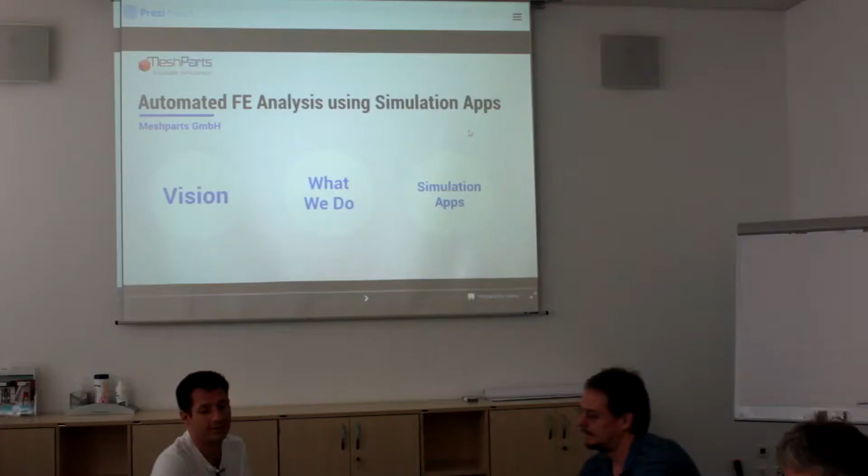Can I see this? Oh, I cannot see it. It's just not possible to have one screen and also see the window. So it's going to be a little complicated to look at you and at the presentation, but let's start.

Actually, I have two presentations. One is the Prezi presentation, and one is the PowerPoint presentation that goes more into detail. The first part is just presenting what MeshParts is doing, what are our products and our vision.

Let's start with our vision. As you can see, our vision is to simulate machine tools, machines. And our vision is to have a virtual simulation model of each single part of each manufacturer. I'm talking about mechanical parts like linear guides, ball screws, bearings, and drives.

Secondly, our vision is to have a component-oriented finite element simulation software for all machine manufacturers. And I'm going to present the software and the library in the next steps.

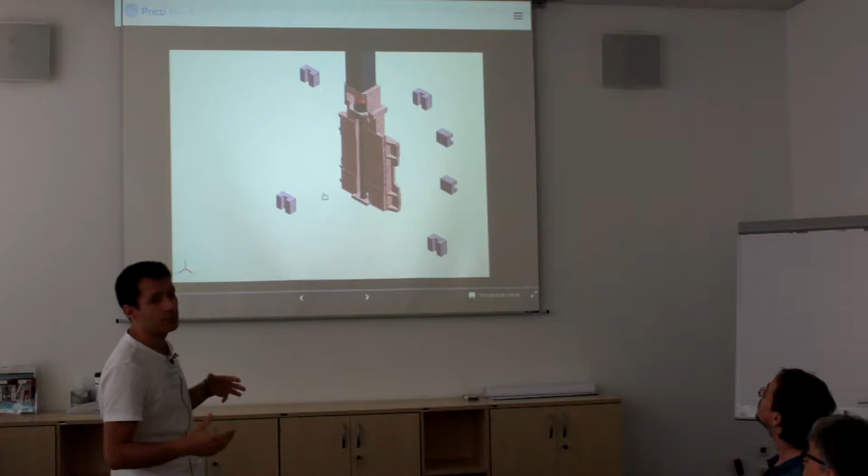Here is just a small video showing the basic idea behind our software. So here you have different finite element models, and you can pick up those models from our library of simulation models and assemble them like you would do this in a CAD system. You can build up very big assemblies of structures just like in a Lego play, and then you can compute, like here in this case, vibrations of the machine, which are very important.

Everything here is TCL. So what you saw is done in TCL, and everything you will see is TCL. So it's about TCL at MeshParts.

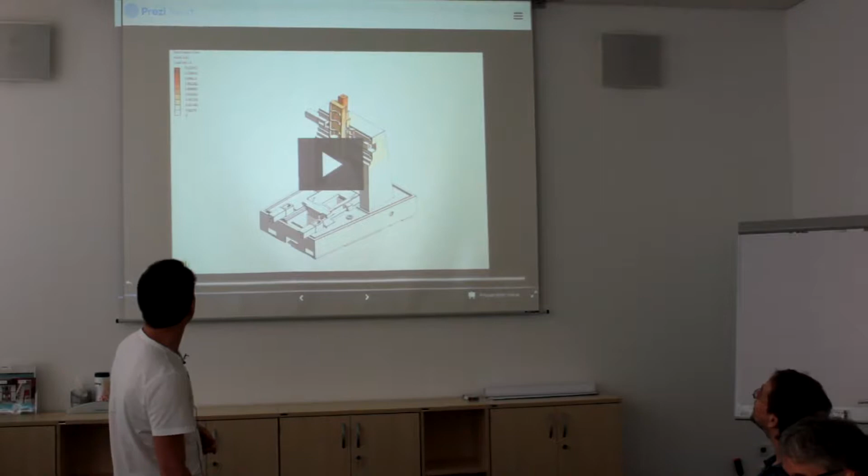Okay, mouse is still on my screen. Okay, let's go back. About us.

MeshParts is a fresh, small company located in Stuttgart, founded in 2013 with 2 people. Right now we are a bigger team, we are 4 people, and we are planning to grow. Probably until the end of the year, we'll be about 10, and we are looking forward to expand our team. So we actually also need new team members. I also search for somebody that can program in C, C++, and TCL.

How we started? Well, the starting point was a research institute, the so-called ISW. This is a research institute in Stuttgart about machine tools and control of machine tools. This is actually where I started as a student and later as a research employee.

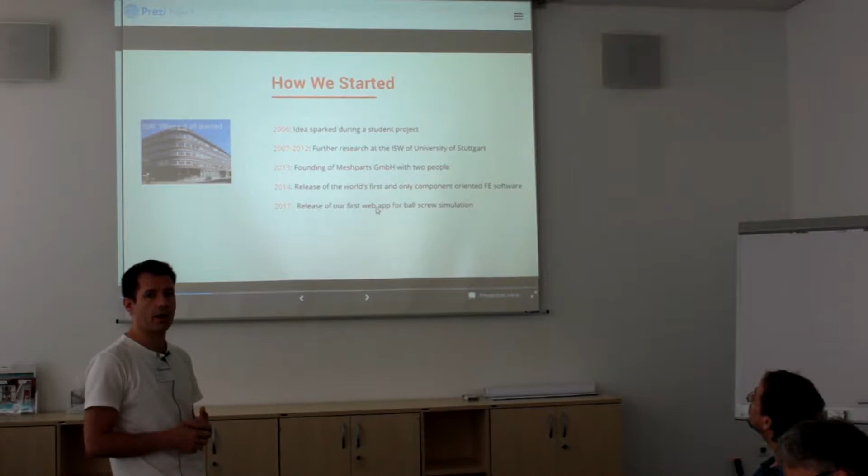And moving forward to simplifying simulation, we are actually doing other stuff right now. We are also doing the so-called web applications, where you only have to input parameters of some standard models, and you can get your simulation report from the web browser. So you don't need any knowledge about simulation, but behind the scenes is still our software, behind those web applications.

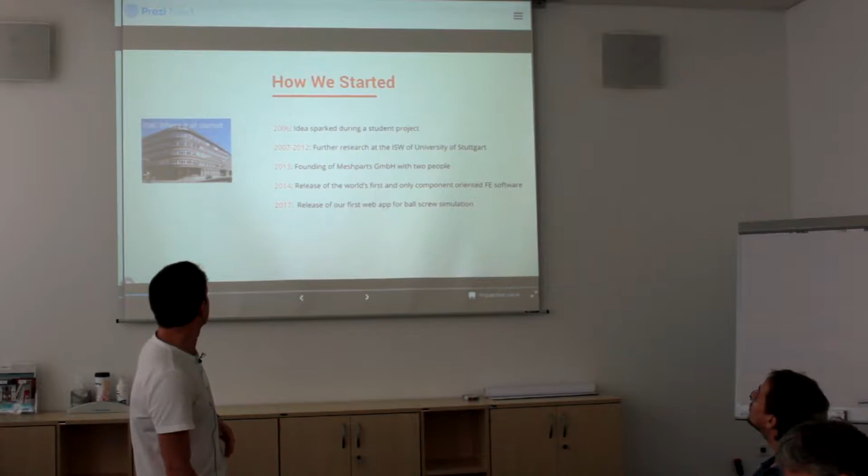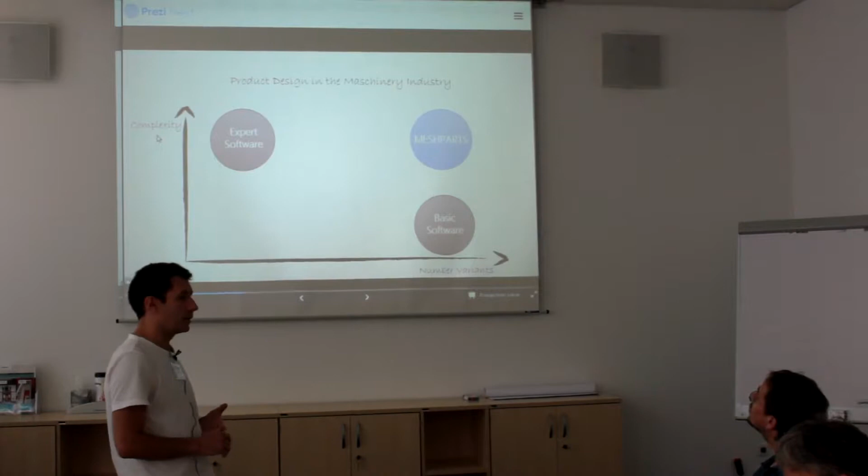So this is how we started. Our strategic positioning, when you look at the market, you have this positioning here. On one side, you have the expert software, which makes it possible to deal with high complexity of modeling. But the drawback of this expert software is that you cannot do a high number of design variants.

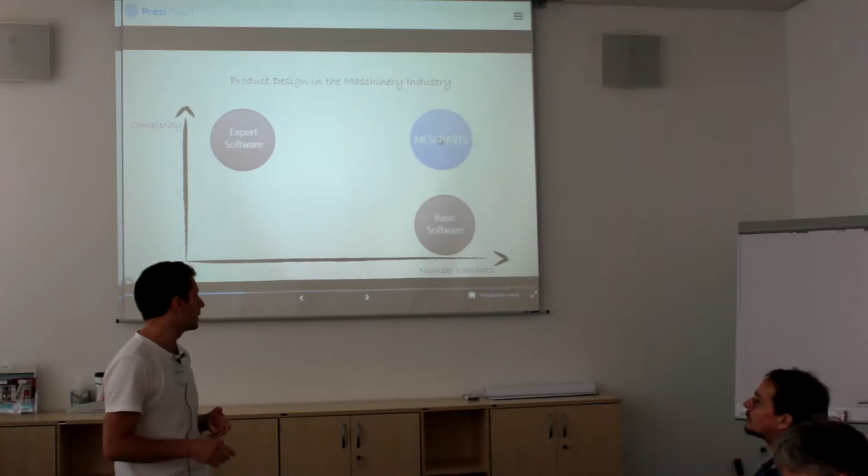So if you want to study design changes in your product, it's going to be difficult. And on the other side, you have this basic simulation software, which doesn't really allow you to do complex things, but it's really fast, and you can do design changes very fast. MeshParts is positioning in the right upper corner, where you can deal with high complexity, and at the same time generate a big number of design variants in a very short time. So this is our strategic positioning.

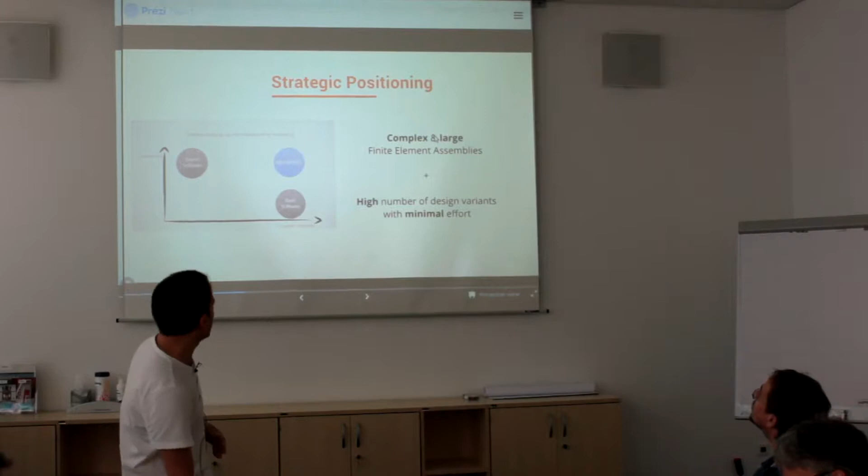Complex, large finite element assemblies and high number of design variants with minimal effort. This is our target.

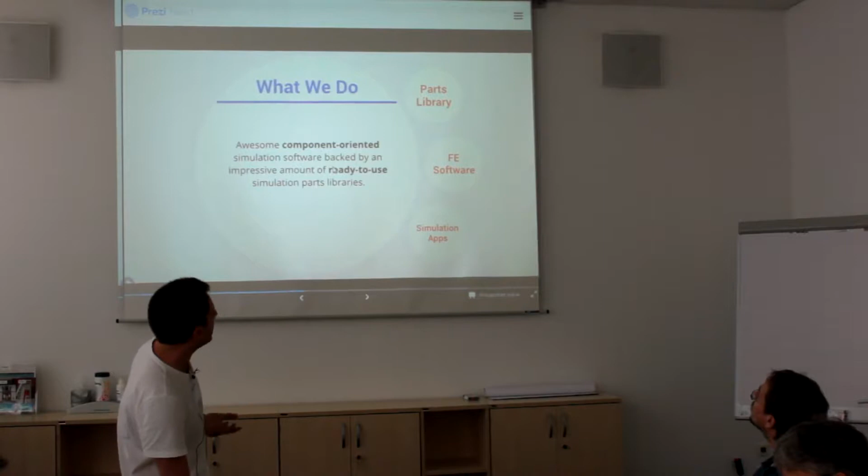So let's go back to what we do in a more concrete way. We have this really awesome component-oriented software, which is almost completely programmed in Tcl, and the whole software is backed by a very impressive amount of simulation models inside of a library, which is available online for everybody to use.

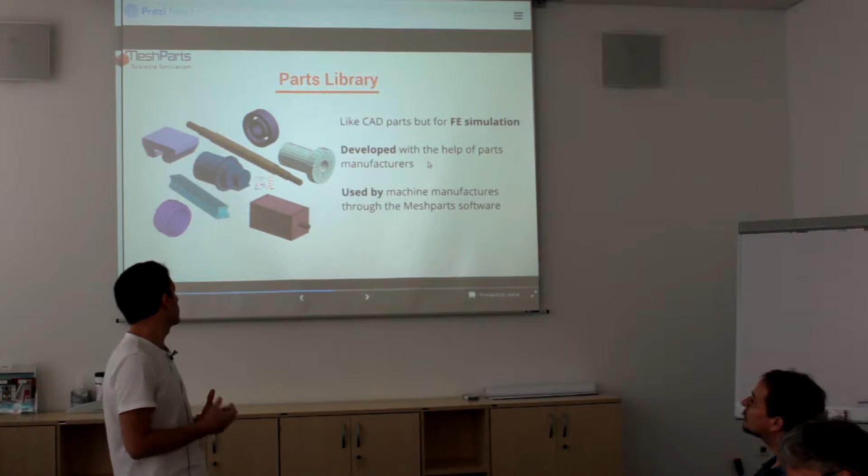I will show you some examples from our parts library. These are the typical models inside this library—mechanical parts that really have mechanical behavior. For example, if you have a gearbox, it will behave like in reality with stiffness, transmission ratio, and so on. So everything comes as a ready-to-use simulation model.

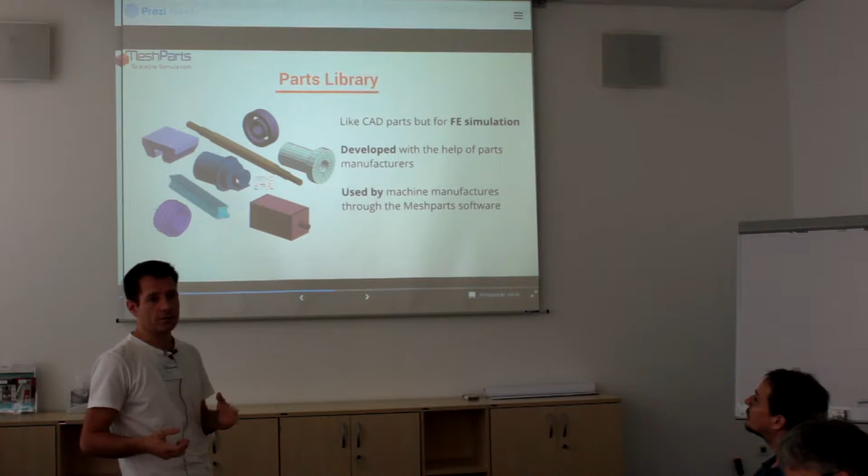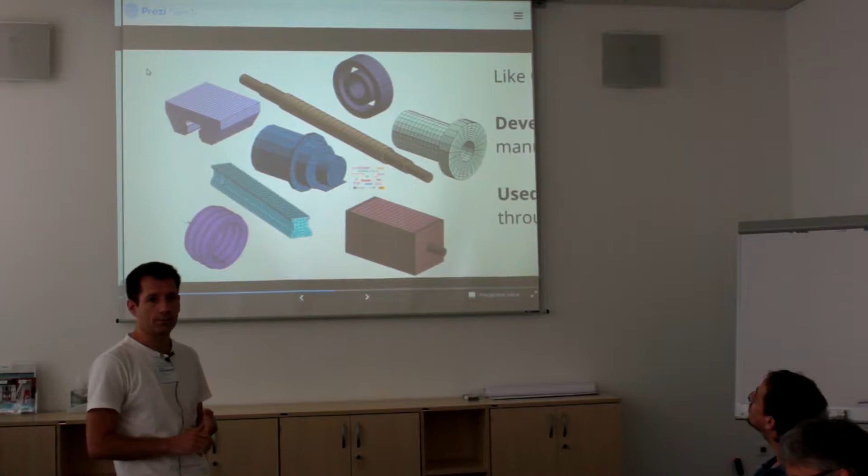We do this for all the typical manufacturers of components, and currently we are extending the number of manufacturers having their components in our library. So if you want to think of it, it's like CAD parts libraries, but it's not CAD—it's finite element simulation.

The concept is that we develop those libraries with the help of parts manufacturers, and the machine manufacturers, who are customers of the parts manufacturers, can get those libraries and actually use them in their design. This simplifies the design process dramatically.

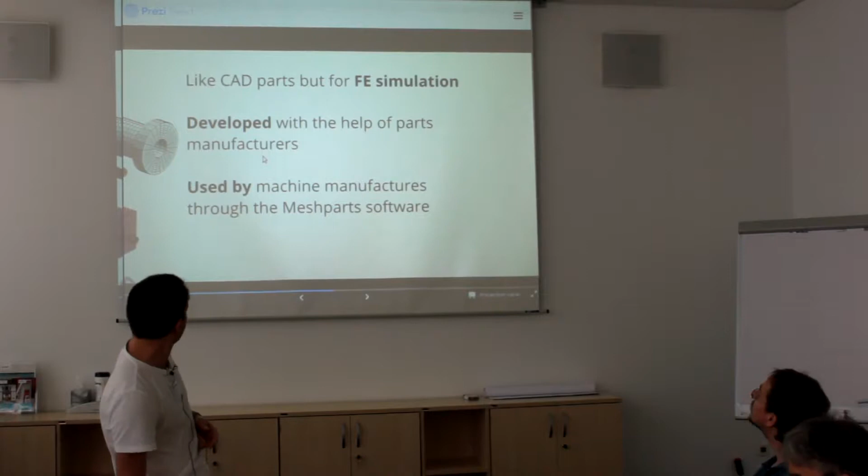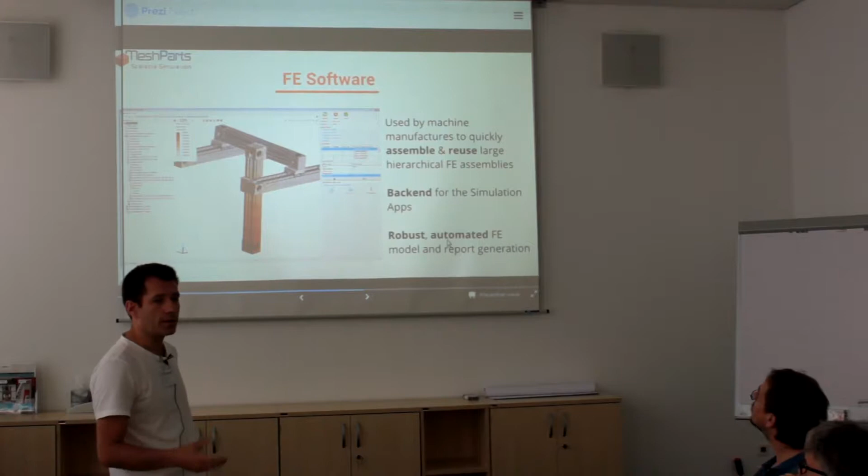The software is also a back end for simulation apps that run in the browser. This software allows you to robustly automate the model generation process. I will show this later.

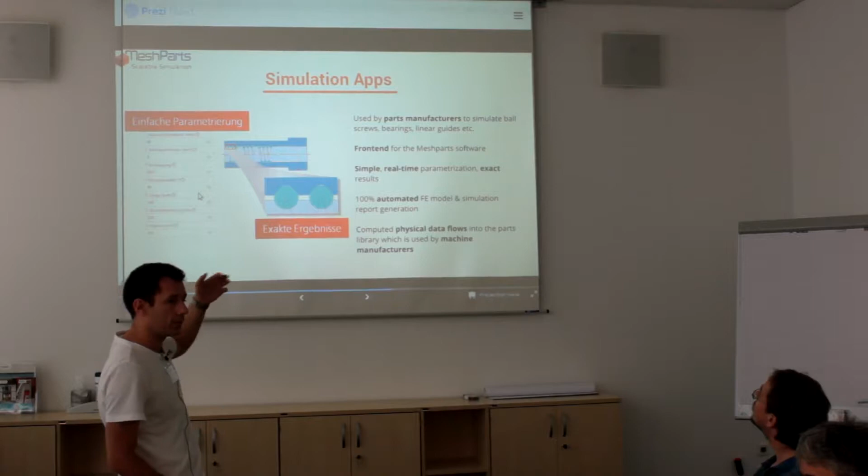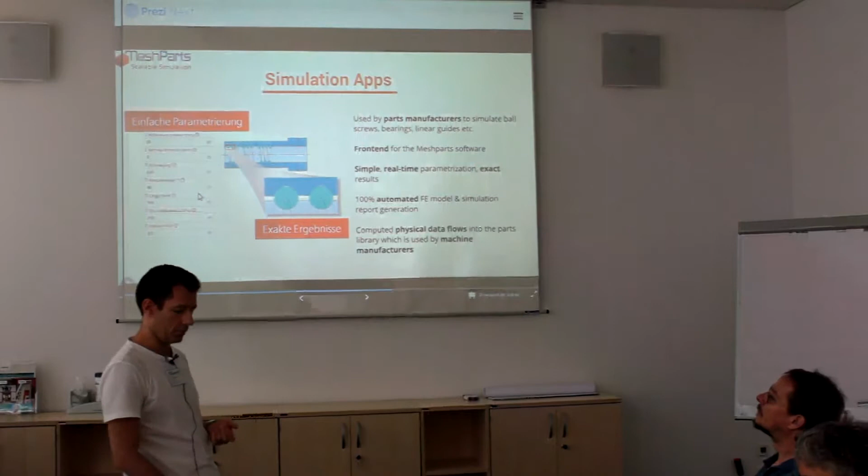This is just an introduction, and I will also say a few words about our simulation apps. This is a typical UI of the simulation app, where you input your parameters and hit send to generate a report simulation, and at the end you get a simulation report of your product. But this is not the focus today.

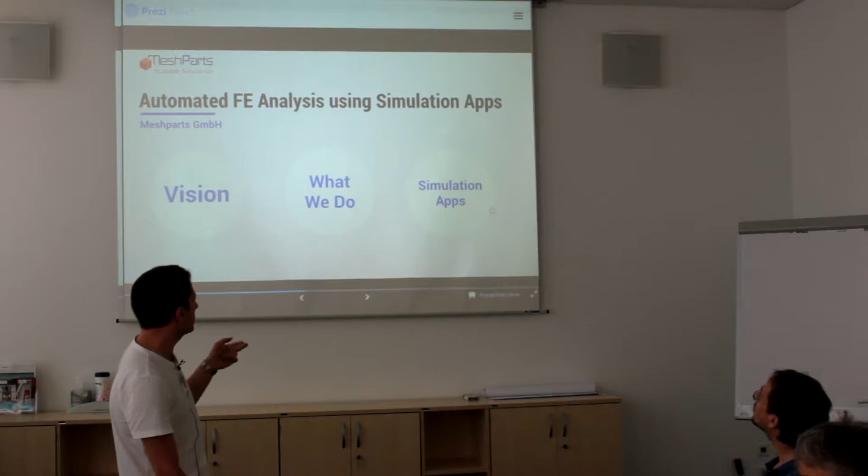Today we are going to talk about the software. So I will skip the simulation app thing, but you can read more about that on our website if you have interest. I will switch now to my computer because it contains the PowerPoint presentation and the software.

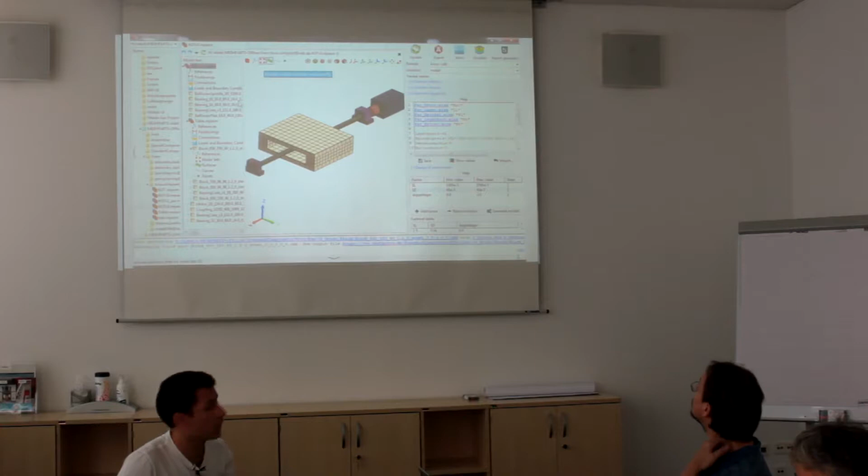So this is a more detailed screenshot of the software. As you can see, it's fairly complex. At the same time, it's easy to use.

I just want to highlight the packages that we are using here, because of course we have developed a lot of code, but at the same time we are using a lot of free packages that are available to the EuroTcl community.

One of the main packages here is TreeCtrl and shellicon, which allows us to make those nice looking trees—for example, one that really looks identical to the Microsoft Explorer tree, and another one that displays the model structure, the so-called model tree.

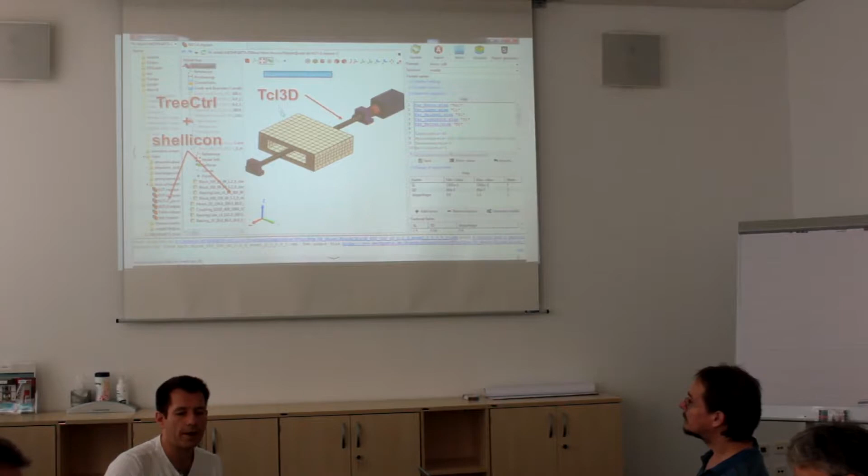Secondly, we are using the great Tcl3D package of Paul Obermeier—thank you—which allows us to do very fast displays of large models.

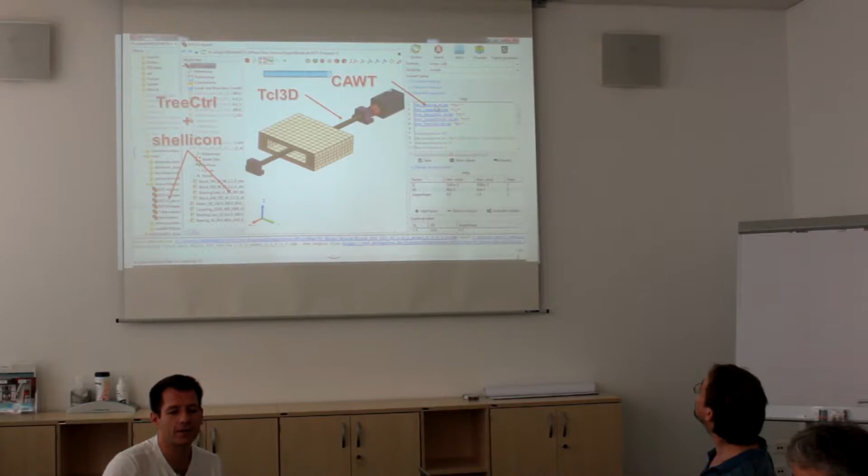We are also using more of Paul Obermeier's code, especially the Excel integration that allows us to read Excel files and display the content of those Excel files.

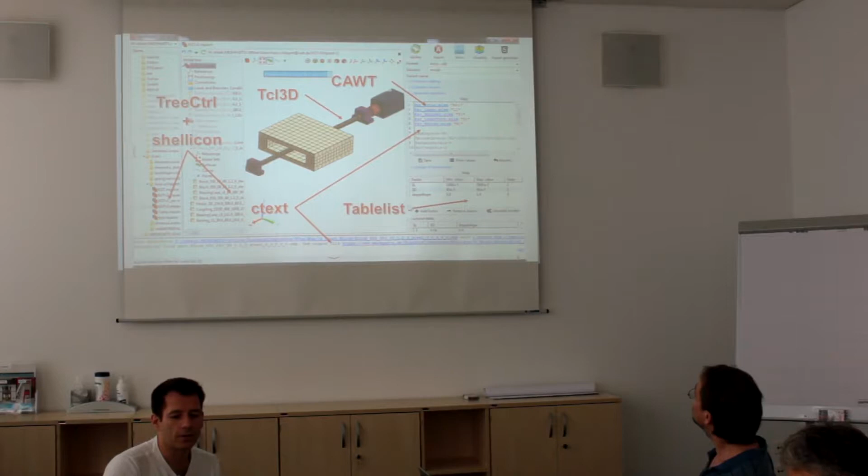The text widget and ctext—I'm looking forward to getting the improved version of text, because we are using this a lot. And also the Tablelist of Csaba—thank you, Csaba, again for your update.

Those are the main packages, but actually we have a total of 30 external packages used by our application in order to make this software possible. So this is the complete list of our external packages.

I would like to show a little bit before I really show you the software. I would like to explain how our communication architecture is set up.

Because we have this software, the MeshParts software, it can be run both as a client or as a server. It's the same software—you just start it with a specific flag, and then it runs in server mode.

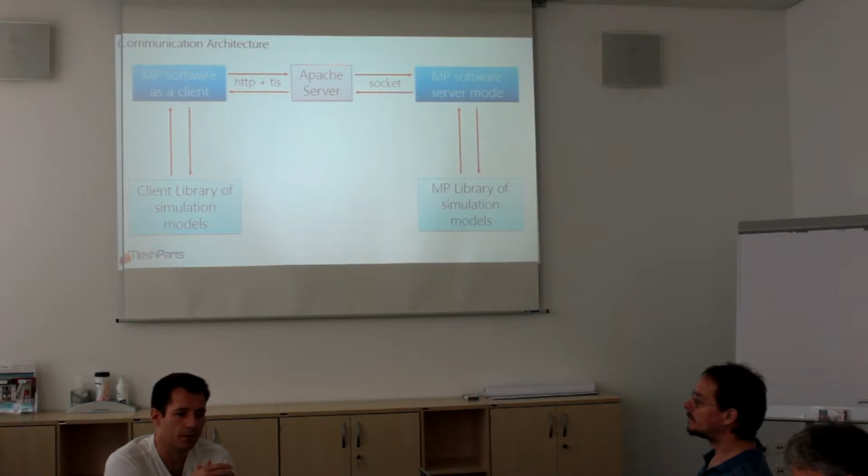So you can put it on any web server, and it will allow you to communicate through an Apache server with the software and basically do cloud computation. This simplifies a lot of the development process because we don't have to have scripts on the server and separate scripts in the software—it's the same thing. So this is the structure we have.

Imagine you as a client are using our software, and what you want to do is some computation, or download some simulation part, or generate some simulation parts on the server. What will happen is the client software will communicate through HTTP and TLS with our Apache server, and the Apache server builds a socket connection with the same software, but in server mode, and the software will do your request, whatever that request is.

On the other side, we have this MeshParts library of simulation models, hosted on our server. You can download those parts through this chain here.

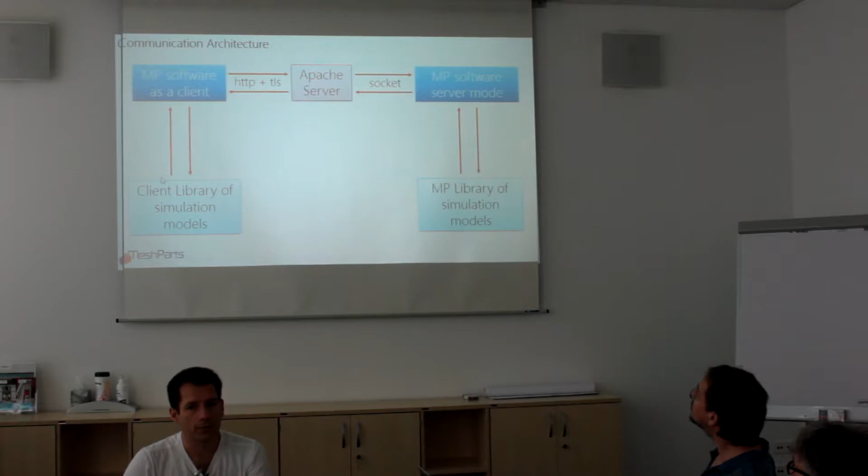The client software will download those parts and save them in your local library of simulation models. At the same time, you can create your own libraries of simulation models that are not on the server and put them in the same library. This is the concept of the communication architecture.

I will switch now to the simulation software, because I also have a wish list, but I would like to show this at the end. Let me start it.

Let me hide the taskbar. Okay, so the screen is a little small, unfortunately, but I hope it's possible. Yeah, it's okay.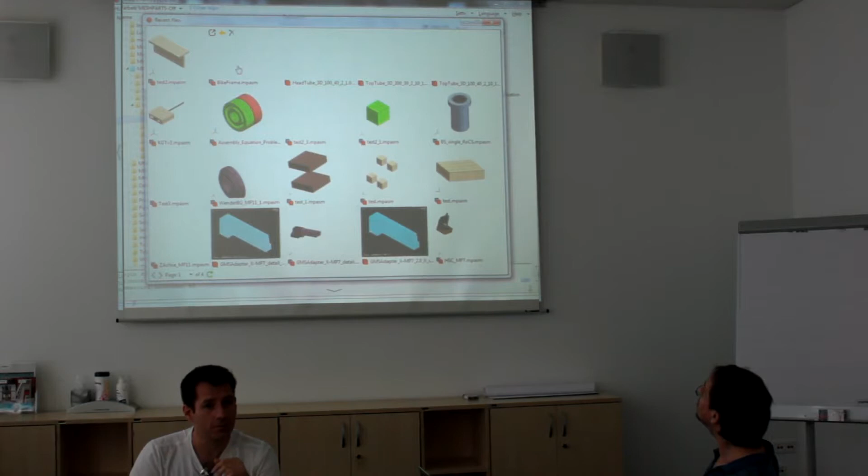After that, the software will show you a history preview of your models. What I did, because of the previous talk about the bike frames, I tried to have a starting point for a bike frame, but I didn't finish, so it's not so impressive. Let me hide this.

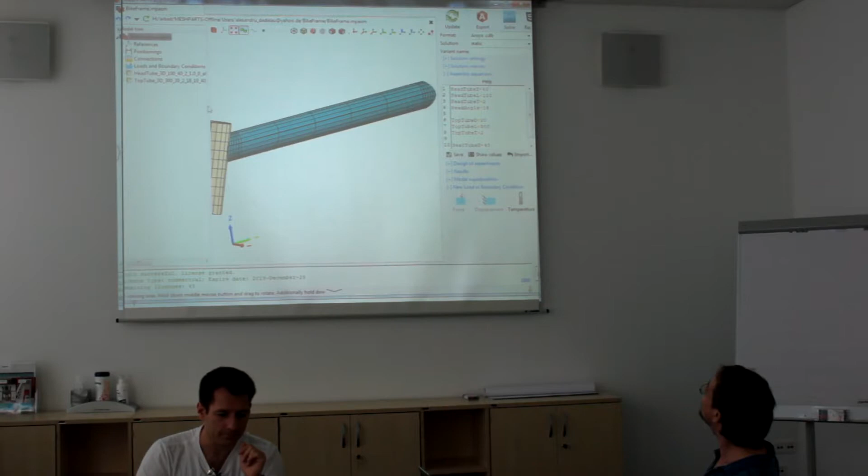So what we have here is basically two tubes. People that are used to bikes perhaps will recognize we have here the head tube and the top tube, and this is where you sit normally, and this is where the fork comes in, right?

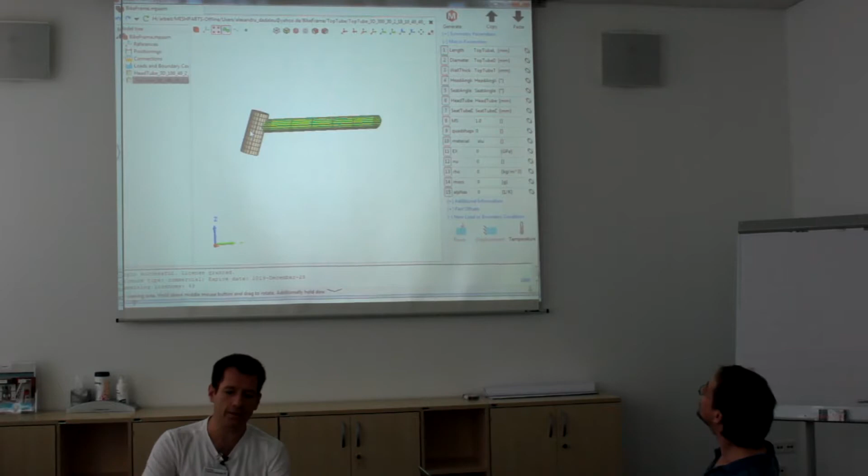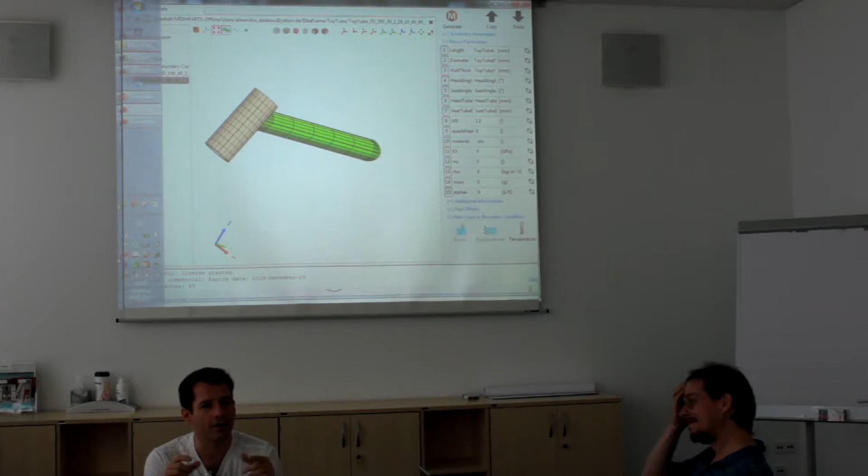I think MeshParts would be a really ideal tool to take the parameters from the bike frame app and transfer those parameters to our software and generate a whole bicycle model for the simulation. It can be done completely CAD-free, so you don't need any CAD import, because our models are parametric and CAD-free. We actually generate finite element models directly, not CAD geometry.

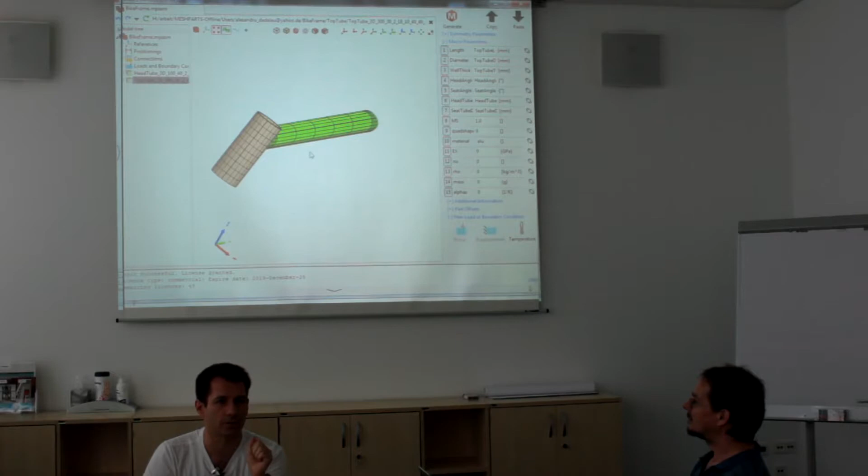But still, if you select a surface here, our software will tell you that this is a cylinder, although there is no CAD geometry behind it. It's just a mesh. So the software identifies geometries from the mesh, from the point cloud.

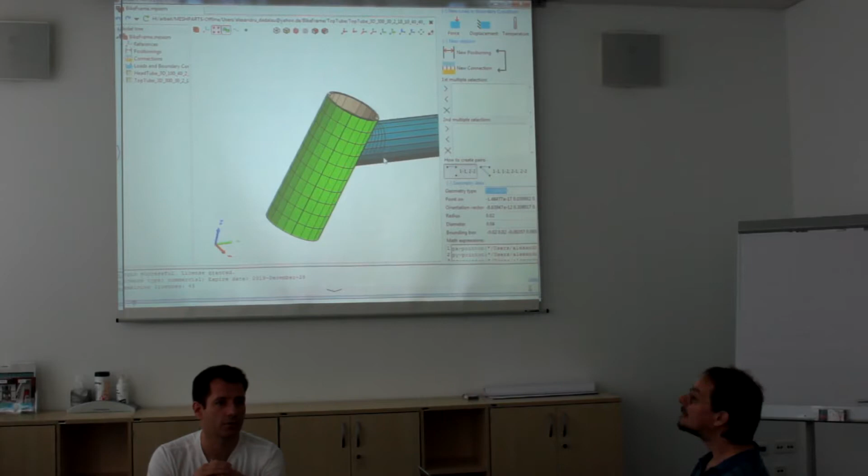So it's parametric. If you click on one part here, then it will show you the part parameters. For example, the head tube length is defined here, the diameter of this tube, and the wall thickness.

And also you have things like mesh scaling factors, you can refine the mesh. For example, if I want to have a finer mesh here, I can take another factor and then say generate. It will take a while to generate the mesh.

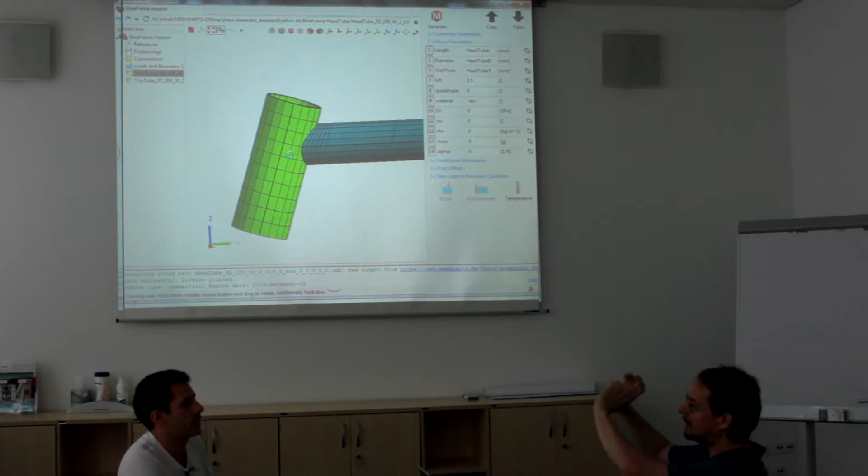In the meantime, I want to ask a question. How did you do the mitering at the surface of the top bar where it touches the vertical, the cylinder?

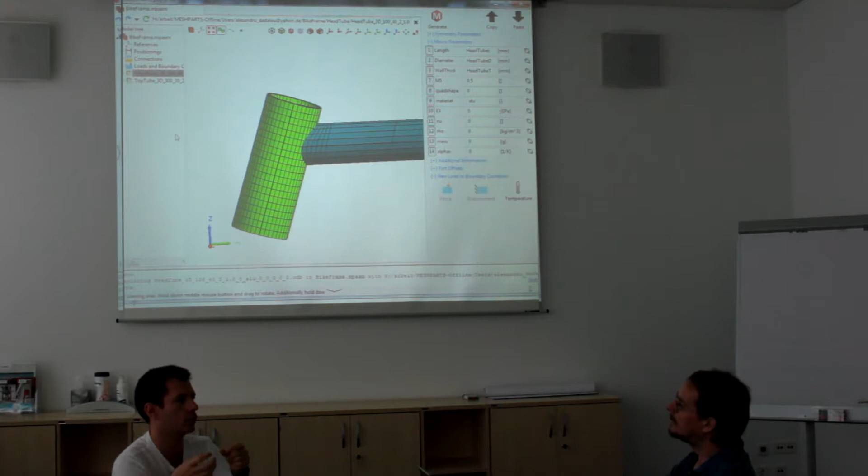I will come back to this later. This is something regarding the second tube here, the top tube. So it has a parameter that says this tube will have to be connected to a head tube having this diameter. So I'm already telling this part which is the diameter of the connecting part. So when I'm generating this, I'm doing basically a Boolean operation of subtracting the head tube from the top tube, and then you will get that.

Exactly, yeah. So you can see now we have a finer mesh here, just by changing that parameter.

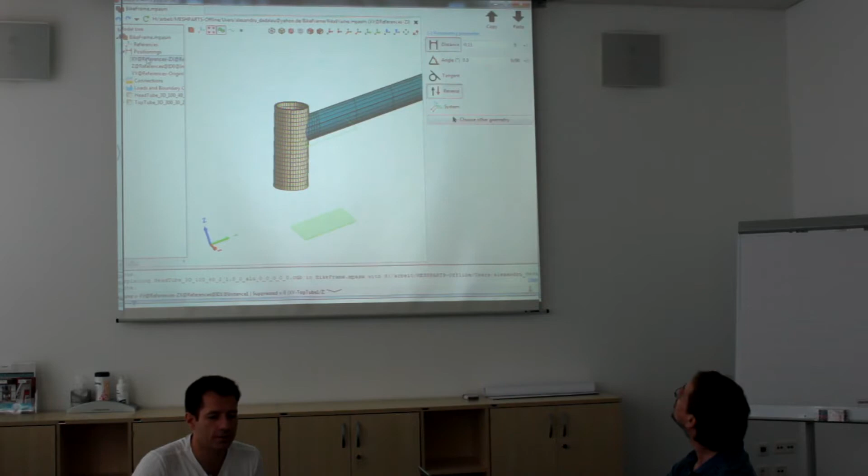You can also, I mean, the whole thing is assembled here. It has positioning constraints like in a CAD model. For example, the distance between the top tube to the bottom is defined here. So, for example, I can change that here. You can see how easily you can adapt parameters.

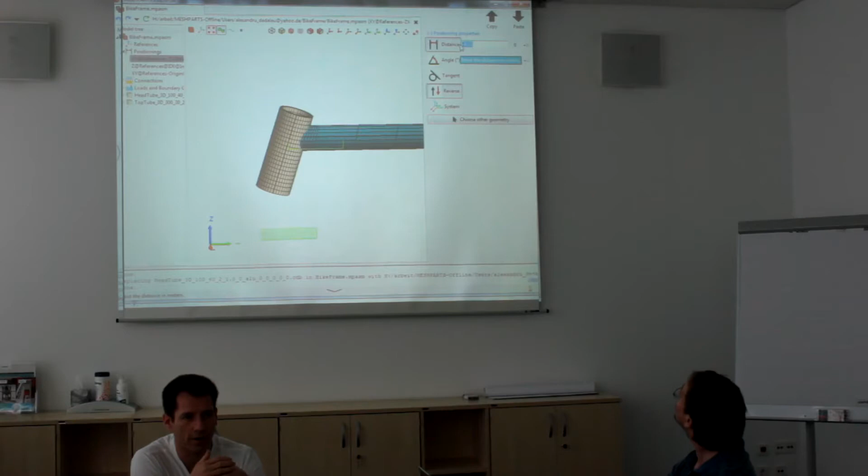Right now I'm entering a number here, but if it's a parameter name, then it's no problem, because in MeshParts everything you enter is or can be a parameter. So we can fully parameterize the whole assembly.

After assembling this frame, we also have connections. So you can see here, for example, that this surface, the red marked surface, is connected to the green one, so that we really have a physical connection here. This is something in the finite element world you really have to specify, because only geometric coincidence does not mean that we have mechanical coincidence, so mechanical connection.

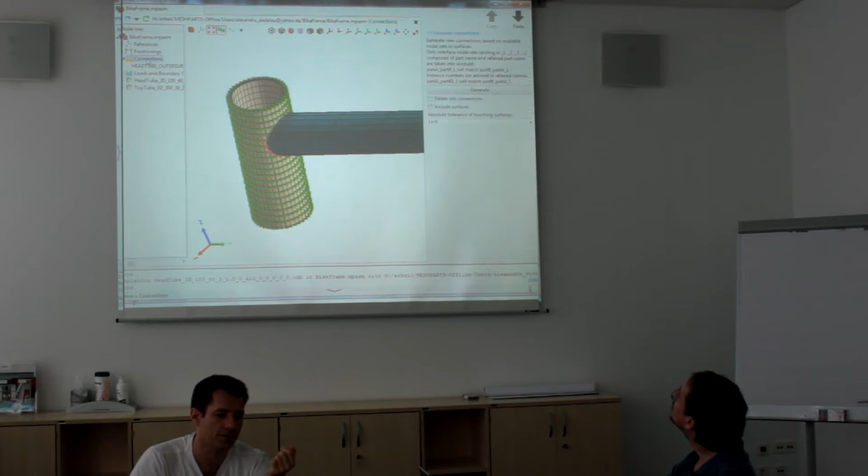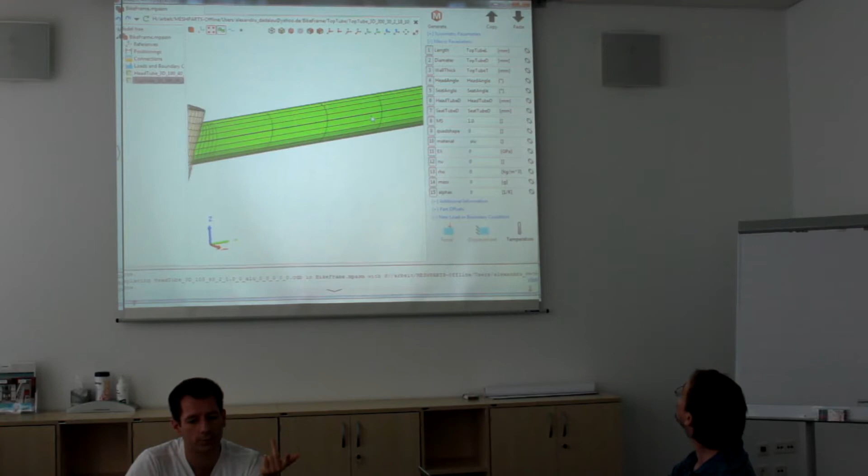And going forward to the top tube, you can see the top tube has also its own length, diameter, and wall thickness. Then we have some parameters regarding the head tube: head angle, seat angle, head tube diameter, and so on. Also for the second end, we have the seat tube angle and diameter, which defines the geometry here at this end.

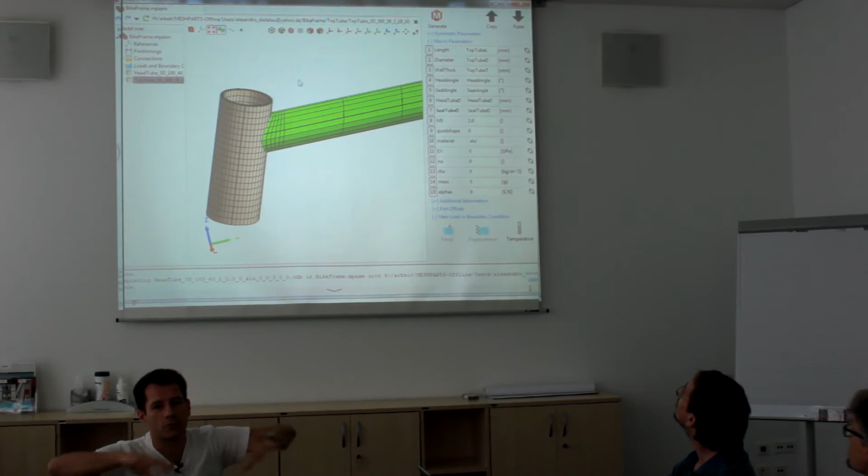So now we have the geometry. Let's imagine the whole frame would be finished now. It's not, but it's just a to-do for me. So it's actually pretty simple. Let's suppose we have all those things.

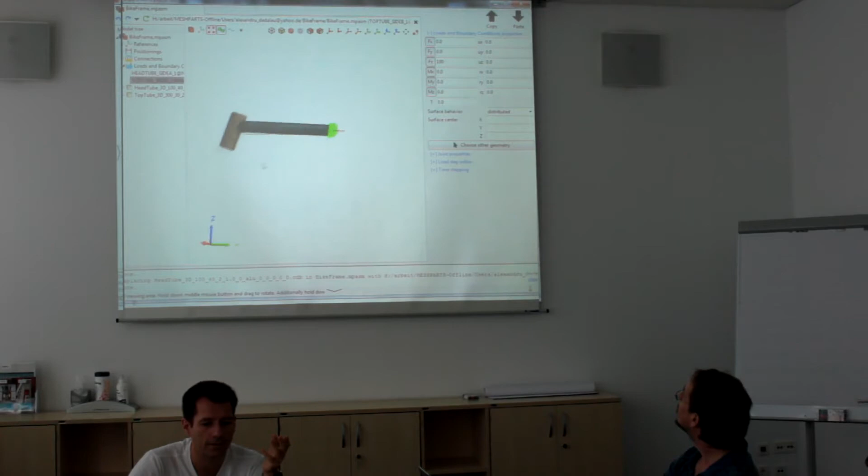What we do now is select surfaces and say okay, this surface is fixed, for example, and at this end we have a force acting, right? You can set up the amount of force, and you can also apply it in different directions here, as you can see.

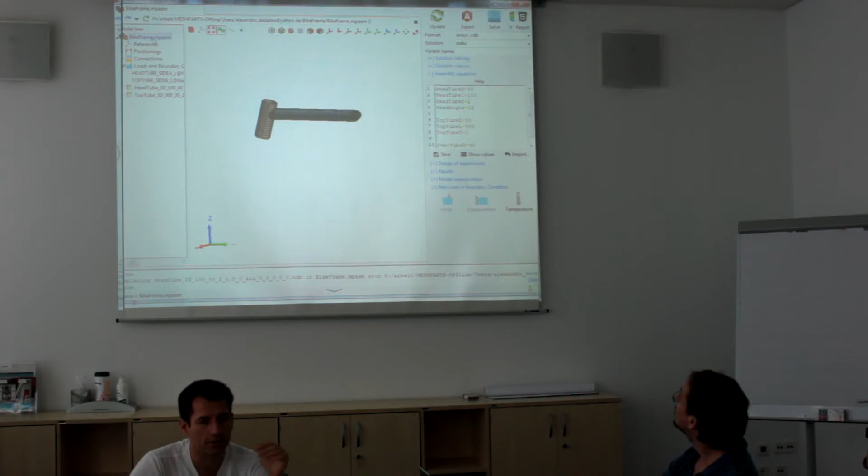That's it. If you are done with your parameterization and boundary condition definition and so on, you can say okay, now I want the solution of this. I want to compute the solution. So you click on the solve button, and the whole assembly will be solved. It takes a few seconds, probably.

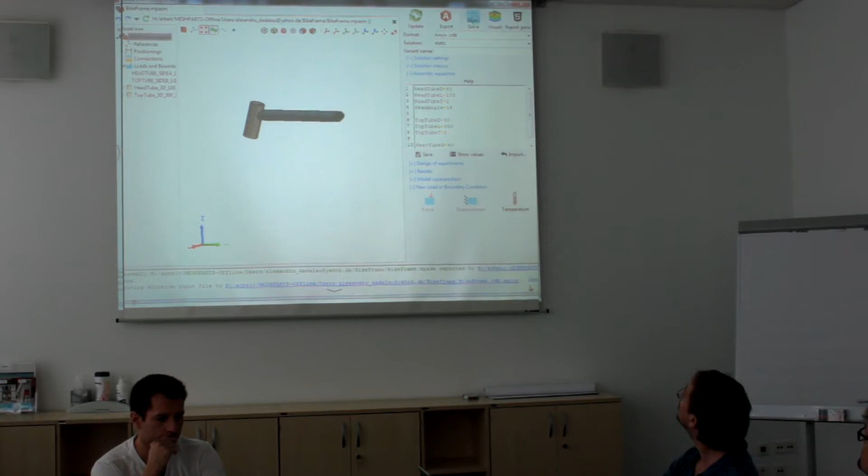So right now you can still do other things and interact with the model while the solution is computed. But right now it's a little bit busy because it downloads the result files.

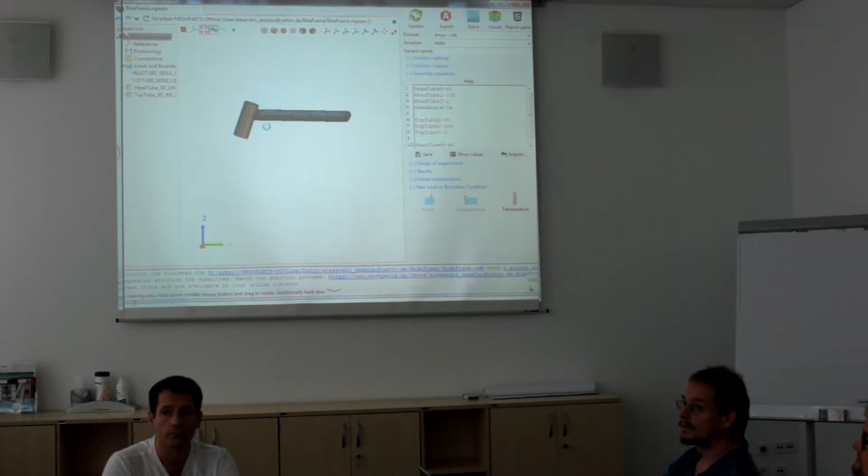So the solution was computed on the server? Yeah. Why isn't the solution produced on the computer? Is it too weak? Well, we don't have the solver. The software only does modeling and post-processing. The solution is done with third-party software. We don't implement the solvers for the finite element solution.

So it depends what you have on your computer. If it recognizes a solver, then it uses that. But we don't have a license for our solver on this laptop, so the software automatically switches to the server and does this. Kind of a batch processing, yeah, exactly.

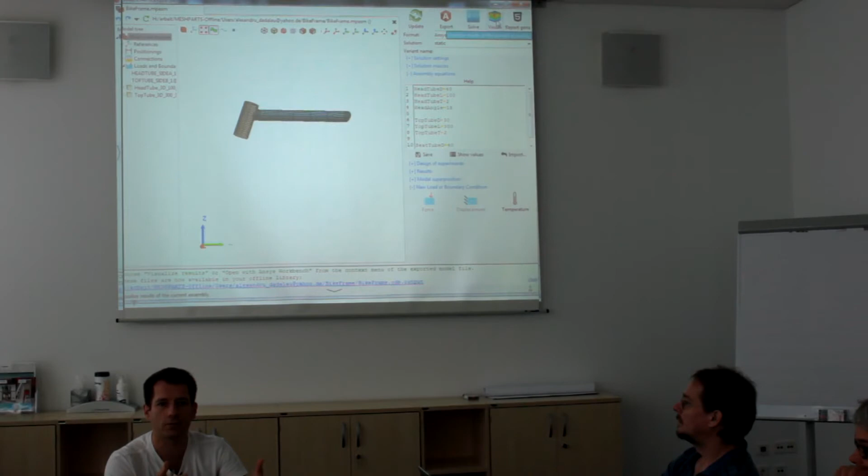This is the reason why I talked about the architecture, because it's a dual architecture. I can have this software on another computer, the same software, no change. Just when you start it, you place this flag for server mode, and then you also need an Apache server that will communicate through sockets with the software, and that's it. So you have a cloud computation solution by doing that.

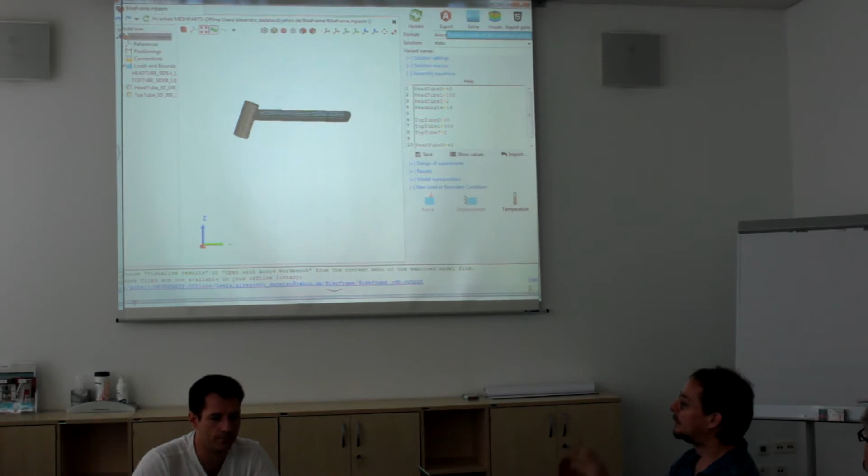Could it use more machines in parallel too, or could it also do some load sharing? Yeah, you can. It has multiple threading, so multiple users can work at the same time on the server.

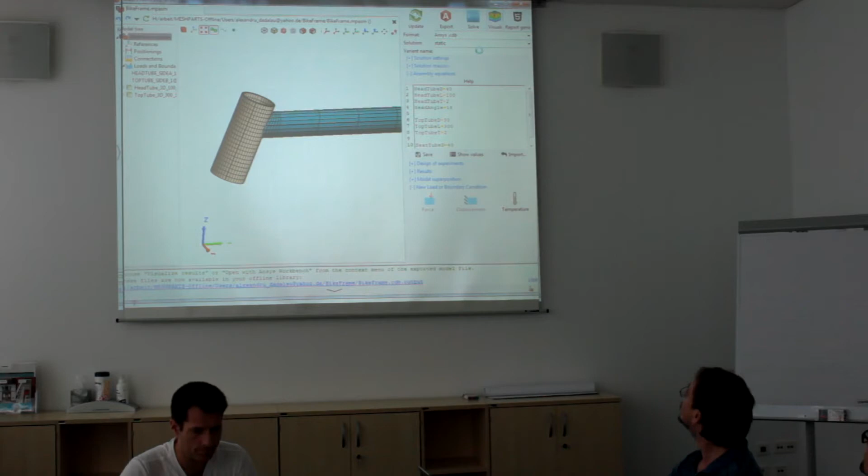So right now it says the solution is done. Just click visualize results, I'll do that. So now you have the deformation of the model. You can also animate the result.

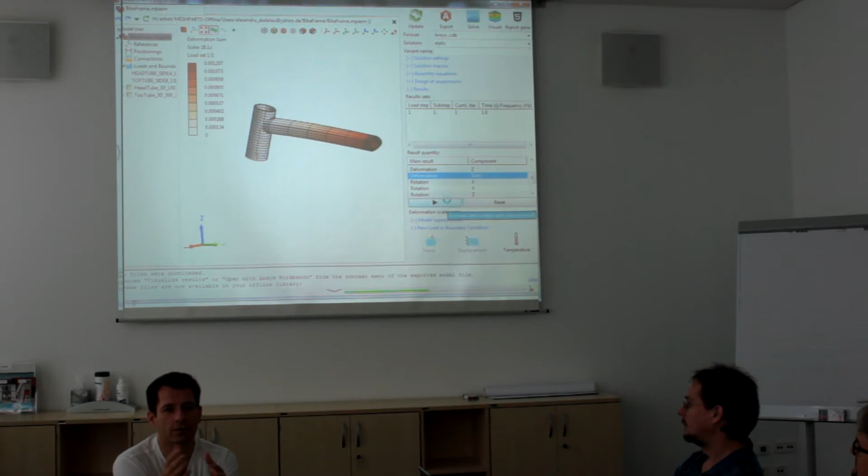We are still looking to improve the performance of the visualization. It's, in my opinion, a little bit too slow, but the reason for that is that we are not using a C function for that. So we did a fast implementation of the visualization in TCL, but one of the tasks would be to really replace it with a C function, and then it will be like 100 times faster.

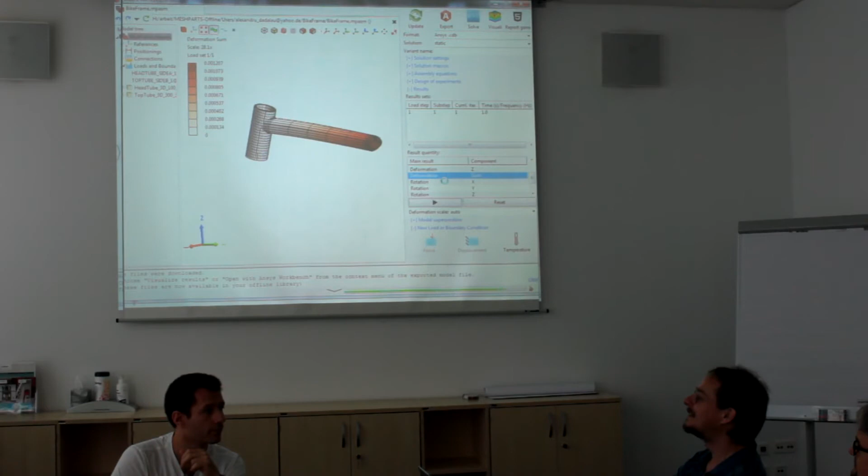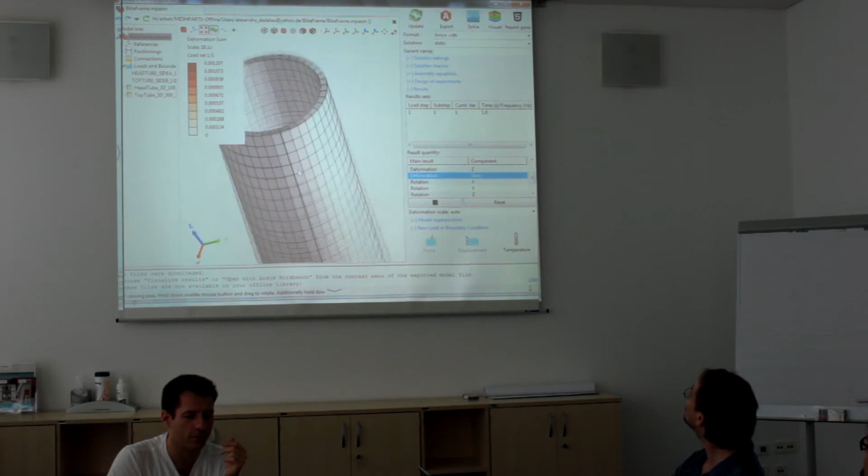Or hope for quad code that it will be also like that, yeah. I mean, once the computation is done, once the display lists are there, it's actually pretty fast in displaying, so this is not a problem. Display is very fast. The nice thing about MeshParts is that you can drag your components away and look into detail what happens with your frame.

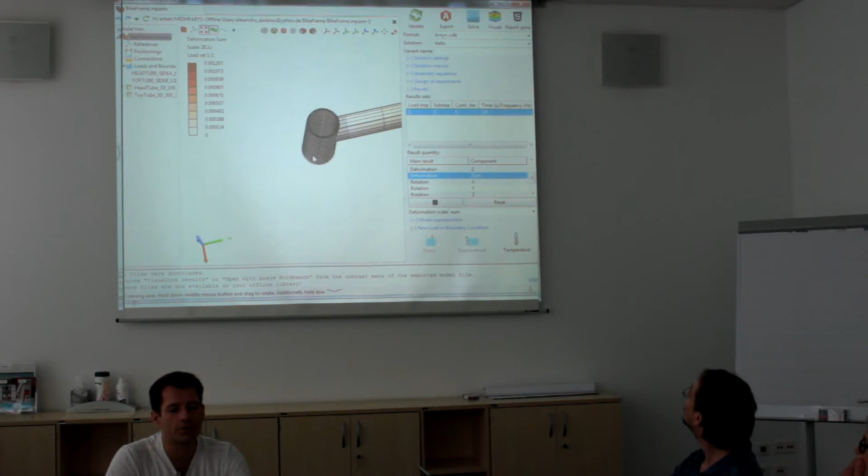So this is a very simple model. It can be extended to any structure. We can also add bearings to this head tube here, and the fork, and so on. So that's not a problem, it's just something that could be done.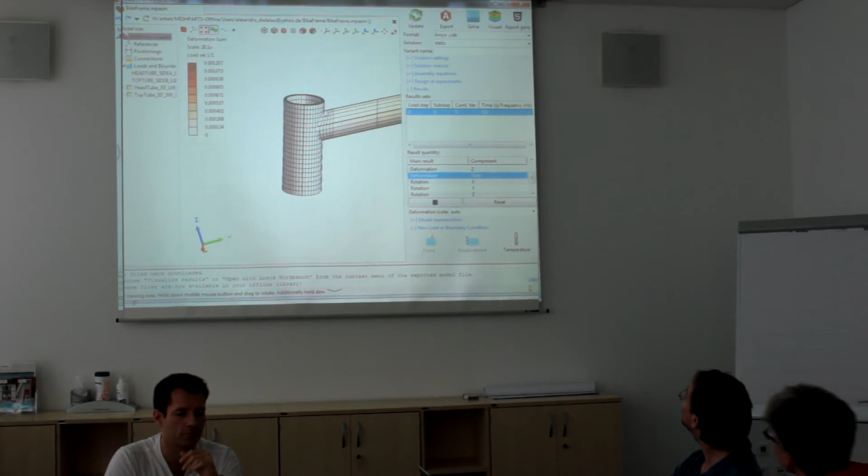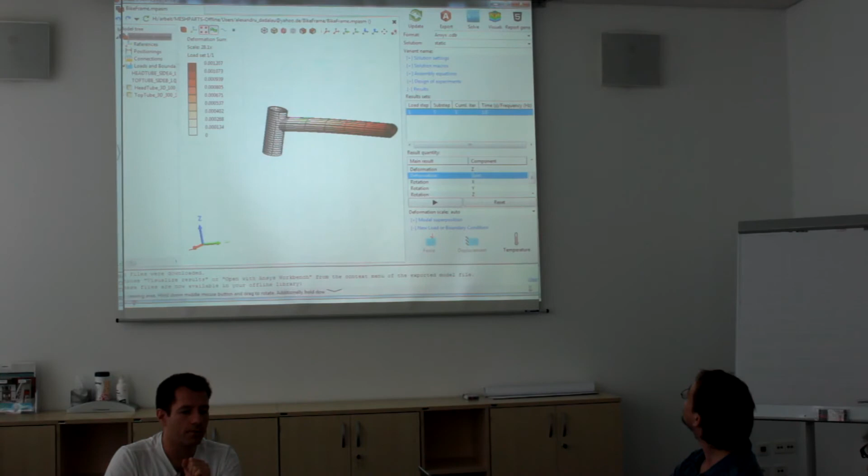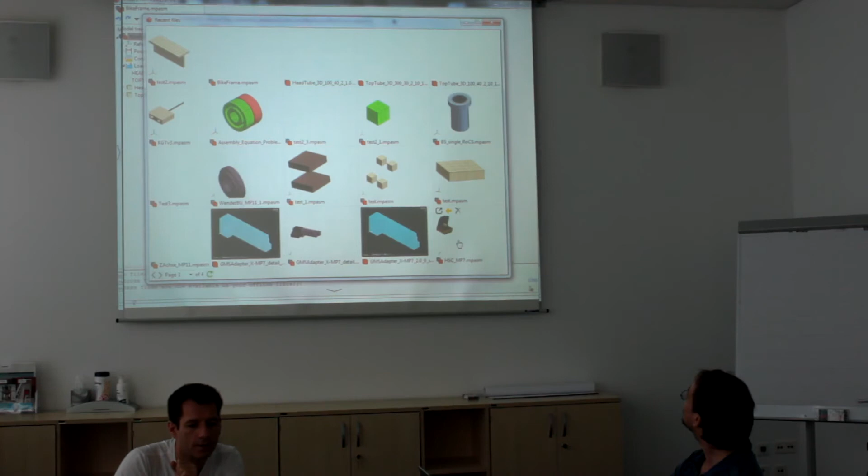And yeah, the software is actually, I mean, we are using this for very large assemblies. This is just a small example, and right now I think that's a good idea to demonstrate this. I will open a larger assembly. Let's open this one, and in the meanwhile, I will continue with my wish list.

This is not really... well, those are things that we need in our software. Those are small things, but as always, small things matter for the customer. So it's always about the detail.

We talked yesterday at the evening event that it would be nice to have a fuzzy string comparison in EuroTcl. Christian said to me, this is the Levenshtein algorithm, the Levenshtein distance, right? Similar. So it's like what Google does for search. If you only know the end of the word or the start of the word, or you misplace a letter, it will still find the right string for you.

We need that, for example, if we want to do a fast search in our model database. We think that a string compare minus Levenshtein option would be a good solution for that. Also, a string compare dictionary option would be something that should be implemented.

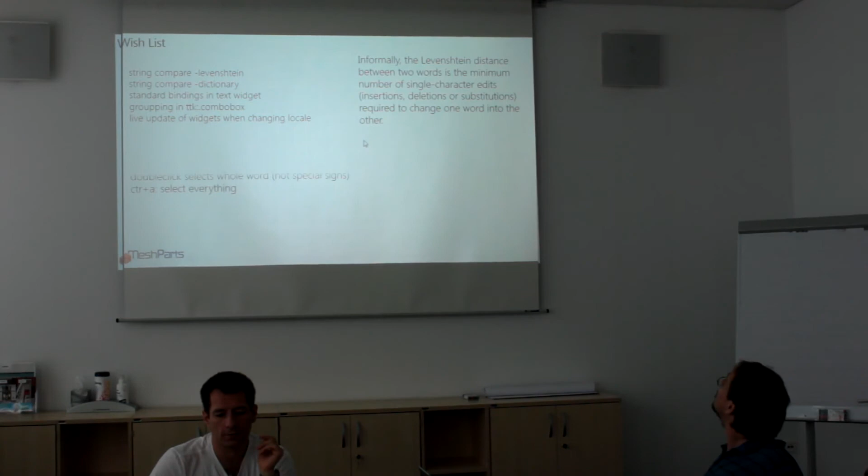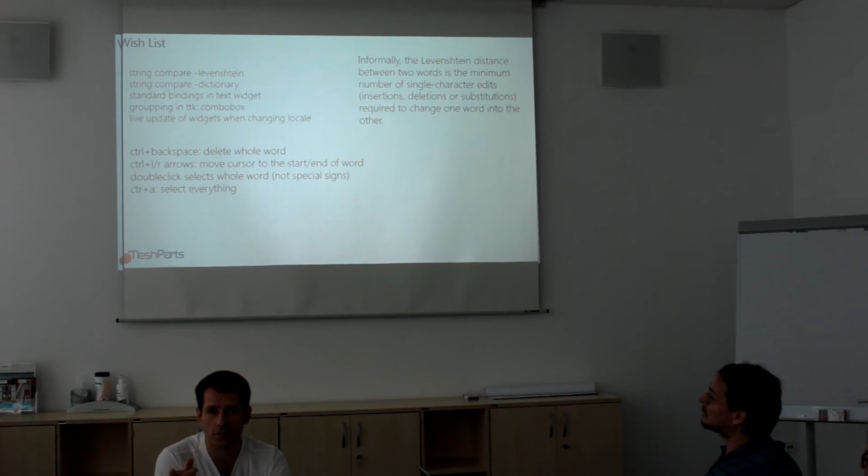Okay, so the next wish of mine would be to have the standard bindings that are common to all text editors in the world also as standard bindings in the text widget. For example, just small examples: if you press the control key and then backspace, that will delete the whole word in front of the cursor. Or if you press the control key with the left and right arrows, the cursor will jump to the beginning or end of the word.

Double clicking a word would have to select the word but ignore special signs like equals and so on. This is not happening right now. And also basic things like Control-A should select the whole text. I think this behavior should be standard out of the box with the text widget.

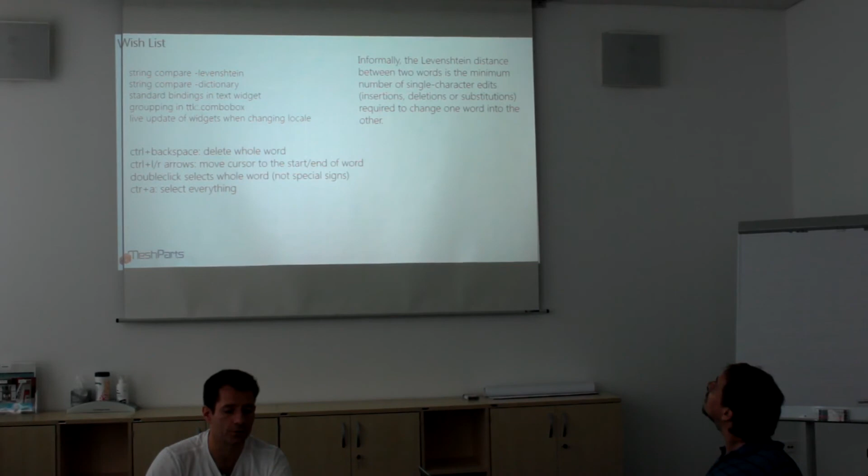Another thing is grouping in the ttk combo box. For example, in our software we have this large list here, and as you can see, some items are actually the same, are groupings. So having a meaning of separators in the combo box, or perhaps the first word in the group as a bold character, something like that.

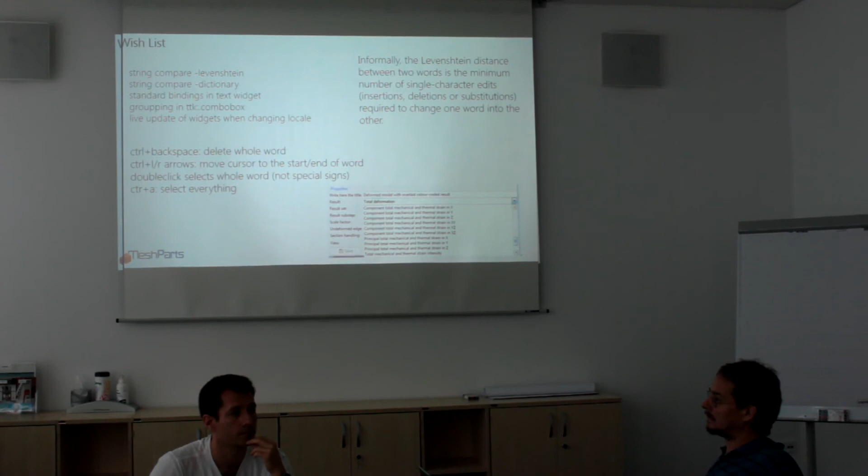There's a limitation in the UI - if you have the standard Win32 controls, you have real limitations. So if the Tk widgets on Windows are based on standard controls, you won't be able to implement it in a very simple way. So it would be a lot more complicated.

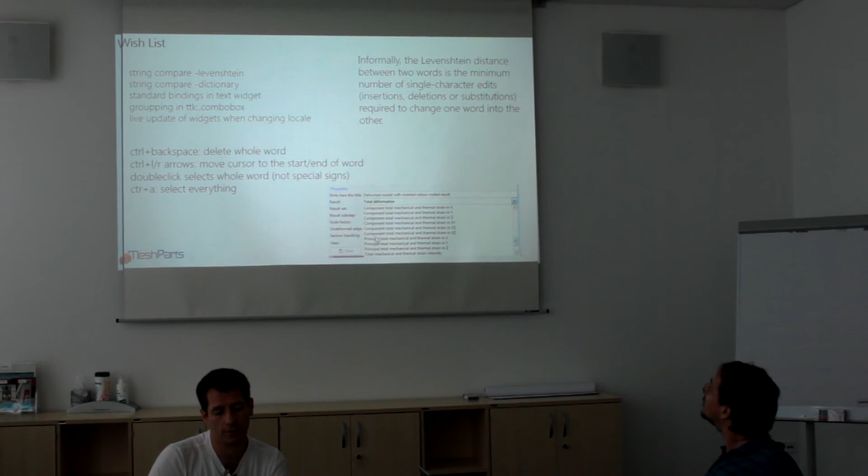Okay, good. Yeah, I'm almost finished. One issue I have is I will show you in the software. This is the last slide.

No, the software is still loading. I think it's the network because it communicates. Okay, never mind, perhaps I will show this another time.

I think this was my presentation. If you have any questions, please ask.

If you get parts from manufacturers, how do you get your parametric models from this part? Because they come from a CAD system, perhaps from Parasolid or other core technologies. So how do you get your parametric models?

Well, if necessary - most of the time parts for the simulation must be simple, so we actually don't need all the details of a CAD model. But on the other side, there are parts where we need a CAD model, and in that case we just add those CAD parts to our library and import them. Automatic CAD meshing and extending the CAD model with the features that the simulation needs is done automatically - we have scripts that do that.